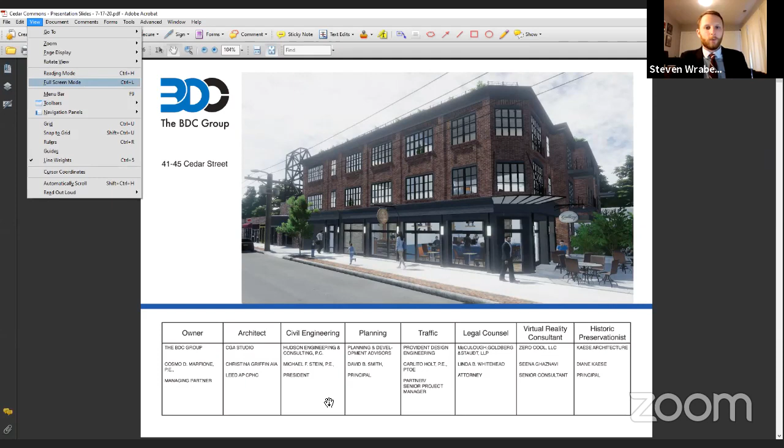So just for the record, again, my name is Steven Wrabel. I'm with the law firm of McCullough, Goldberg, and Staudt. I am here tonight in lieu of Linda. She unfortunately had a conflict, but we are here for Cedar Commons LLC.

As was previously stated, the reason for this joint meeting is that since the project has returned to the Board of Trustees, the applicants and the board have discussed it and the plans have undergone some changes. Most notably, it's now proposing a partial fourth story, so this is the iteration we're now calling Design B. The partial fourth story has a number of benefits we see. Very notably, as the mayor mentioned earlier, it's much less excavation because it allows for parking on the ground level, which shortens construction time and impact.

And it also allows for additional affordable housing. We're now proposing 3 units, as well as a greater diversity of housing types. So with that change, the applicants sought to mitigate some of the impacts, because obviously an additional story typically means additional height. But what you're going to see as we go through the plans is that the overall height of the first 3 stories was actually lowered from what you saw in Design A, the prior iteration. Because the 4th story is only partial and staggered, for a lot of these views, like this one on screen where you're only seeing 3 stories, it's actually a shorter looking building than what was previously proposed.

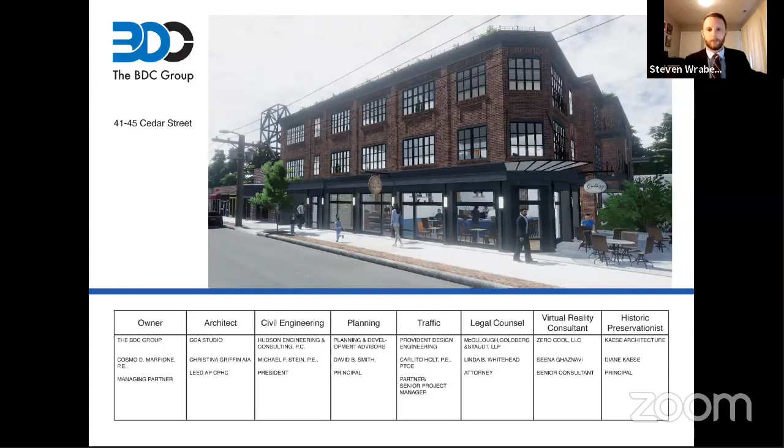The last thing I want to note is that we did just receive the July 15th letter from Mazer Consulting, which acknowledges that our traffic consultant has now addressed all of their traffic comments and questions. So we think these are all positive changes to the project. We think this makes sense. And I'll turn it over now to Christina, who can walk you through the details of the plans and take you through the VR.

Good evening, everyone. Can you hear me?

Yes, good. Okay, I'm Christina Griffin, principal of CGA Studio Architects. We've been through a long process, and I'd like to take you through the changes we've made in response to the comments by the Board of Trustees.

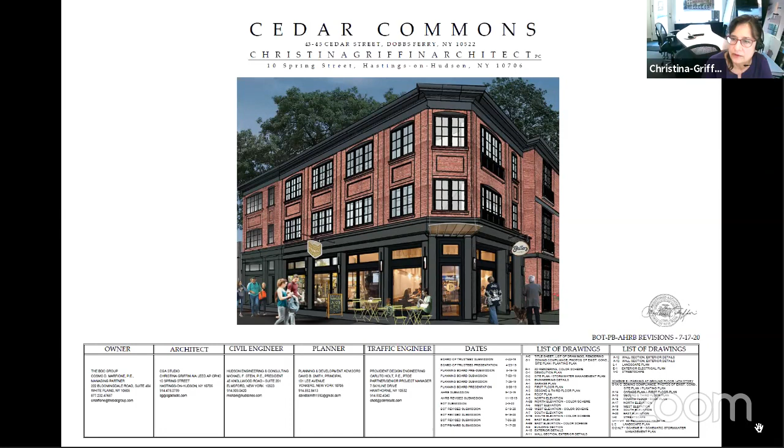We have developed two schemes for the project. Design A is a scheme that was reviewed by the Planning Board and the Architectural Historical Review Board, giving a favorable referral to the BOT. Design A was a 3-story building with parking at the basement level. Design B is a 4-story building with parking at the first floor level, and the 4th floor is set back 37.5 feet to make sure you would not see that 4th story when walking down the street.

The advantage of the 4th story is that we eliminate all the excavation that is significant when we put parking down below at the basement level. So our new scheme, Design B, now has parking on the 1st floor, requires less excavation, less construction time, less disruption of the downtown during construction. The two schemes have the same number of parking spaces, roughly. Actually Scheme A was 27, Scheme B is 26, because we had to reconfigure the parking to make sure it fit on the 1st floor. So we have 23 in the garage and 3 on street.

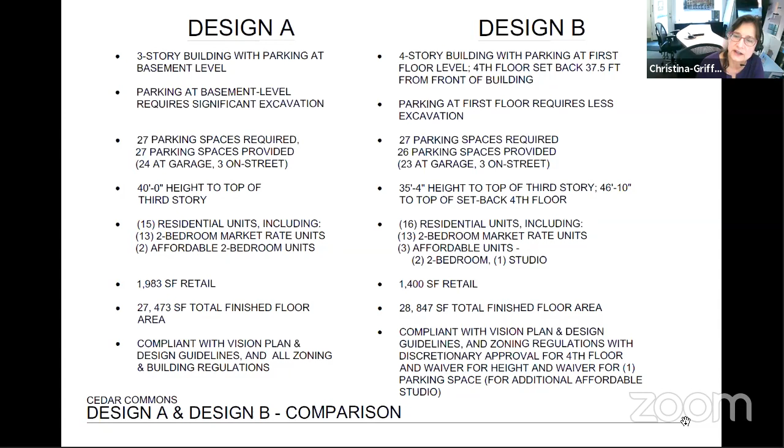We have another comparison chart just to give you a general idea of the benefits of this Design B.

The impact and effect of this project will give an infusion of 1.3 million annual discretionary spending. It will have a significant increase of tax revenue, creation of 50+ jobs, and lower current street parking demand.

The benefits specifically of our new design, Design B, are as follows: decreased construction time, less impact on the village downtown during construction, less excavation, less potential rock removal, 1 additional affordable housing unit, and a 4 feet 8 inch decrease in height of the 3rd floor component of the building.

All parking is concealed from view. Only 3 stories are visible at the rear of the property. There's less retaining wall and more developed green space between the building and the property line adjacent to Zion Church. There's also a slight increase in tax revenue compared to our previous scheme.

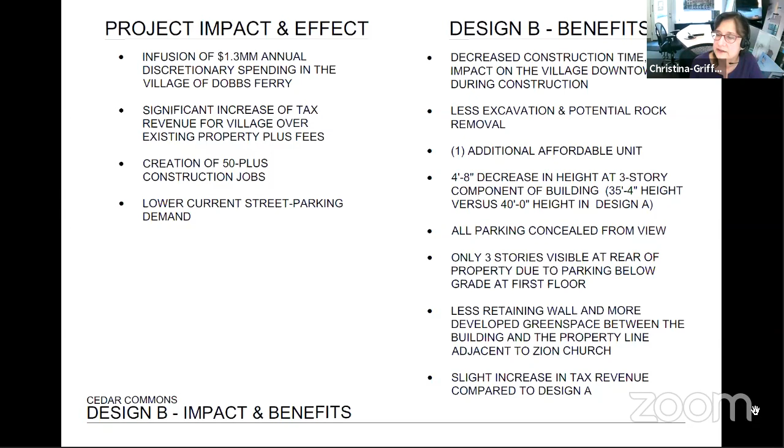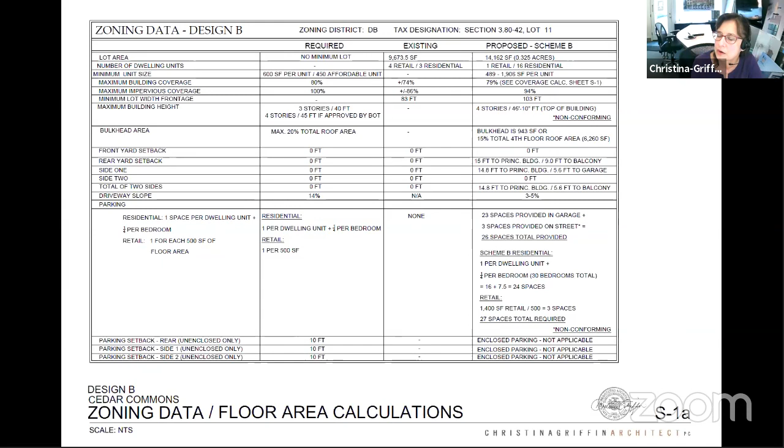Next slide. This is our zoning data, which shows that we will need a waiver for the height and for the number of 1 parking space. In other respects, it meets the zoning code.

This is our site plan and planting plan. In response to long discussions about how to handle the buffer area between the Zion Church property and this building, we changed our site plans to eliminate the retaining wall that we had on the west property line.

We did this so that we could develop the green space and have a more flowing space. We are proposing to add plantings on the Zion Church property, add a few trees, and protect and save the 32-inch maple if at all possible. We had an arborist report made, with recommendations that have been reflected in this landscaping plan.

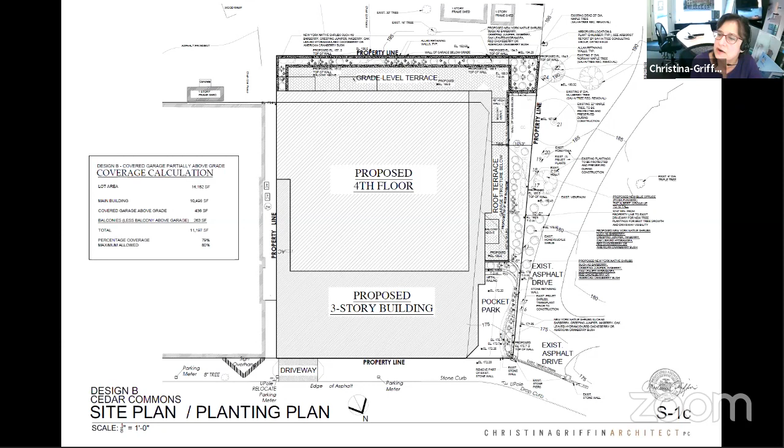We're also showing grade level terraces and a roof terrace which covers the parking area, which is now fully concealed from view. Next slide, please.

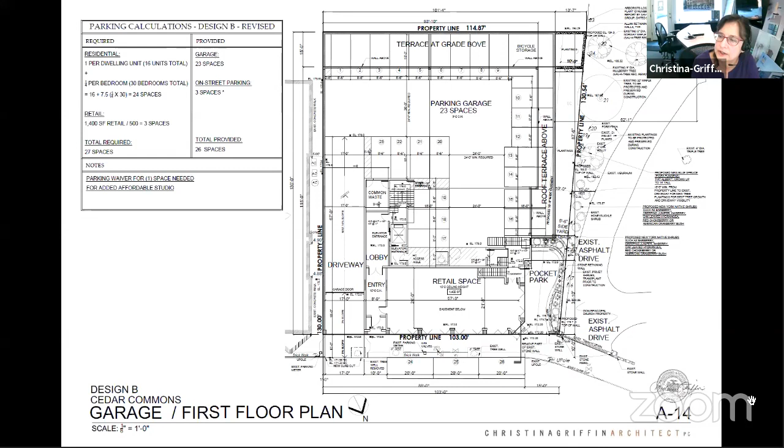Next slide. This is the second floor plan. I'm showing this so you can see that we've added an affordable housing studio unit, unit 2, by reducing the size of the market rate units. Unit 1 is a 2-bedroom affordable housing unit.

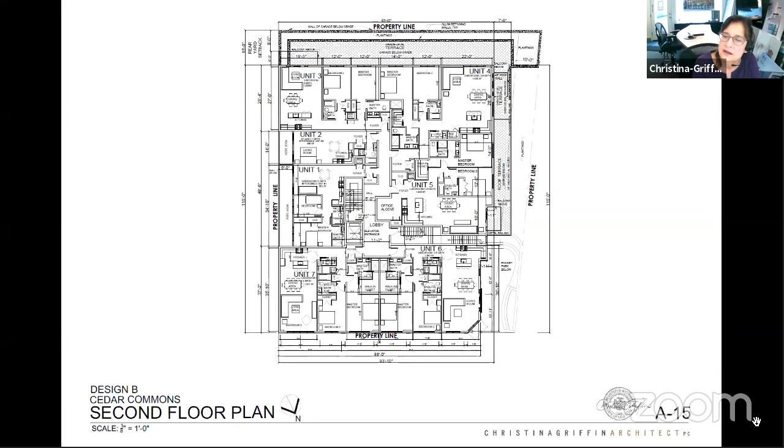On the 3rd floor, we have a 2-bedroom affordable housing unit, unit 13. So we have a total of 3 affordable housing units and 13 market rate units. Next slide, please.

These plans now show a 4th floor. We simply took the units that were originally on the 1st floor in our design A, and we moved them up to the 4th floor so we could use the 1st floor for parking. So these are those three units up here.

We've set back the 4th floor 37 feet 6 inches, and we're going to show you in our 3D views the reason for that is to have this sense of a 3-story building as seen from the street.

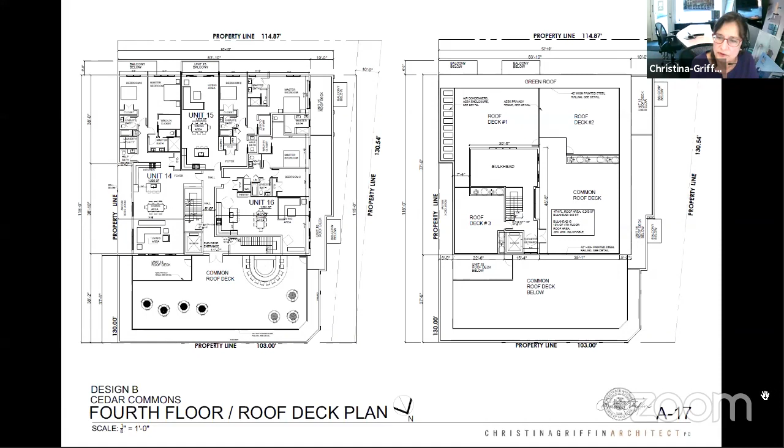This is our elevation. It's the same fenestration and details and window treatment that we had previously, which was reviewed by the AHRB. The main difference is we reduced the height. Now the top of the third floor is 4 feet 8 inches lower, and we are using 12 feet as our ceiling height inside the retail units.

And then up above, you see our fourth floor. The total height of the building is just slightly higher than the maximum of 45 feet because of the space and clearances that we needed down in the parking area. Next slide, please.

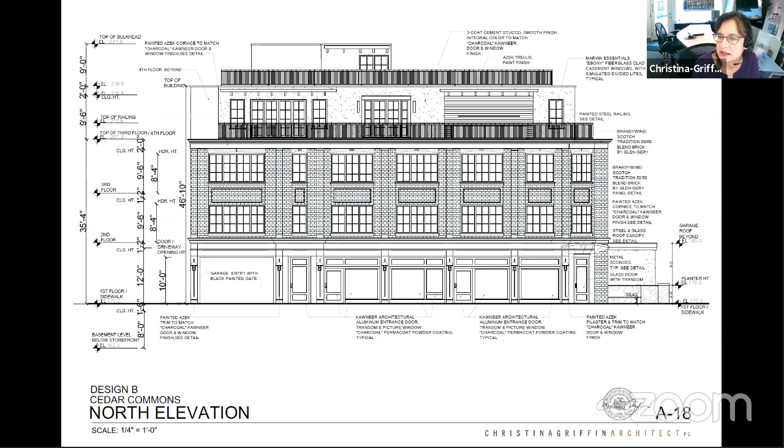This is our west elevation, now showing that the grade is up against the wall of the building. So you'll see this piece of building here that's coming up above the grade is actually the parking garage. Above the garage are terraces, and the rest of the garage is entirely buried below grade, concealed from view.

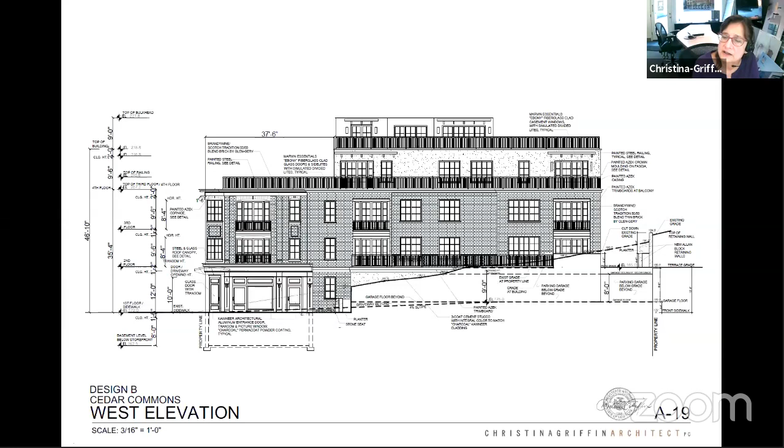Next slide, please. Our south elevation - if you see this dash line here, that is the grade at the South Presbyterian Church property. So when you're up on that hill, you look down and you will see 2 stories of the building, the third floor and the fourth floor. Seen from this view, you will see 2 stories above. And when you're down at the patio level in front of the units, it's 3 stories.

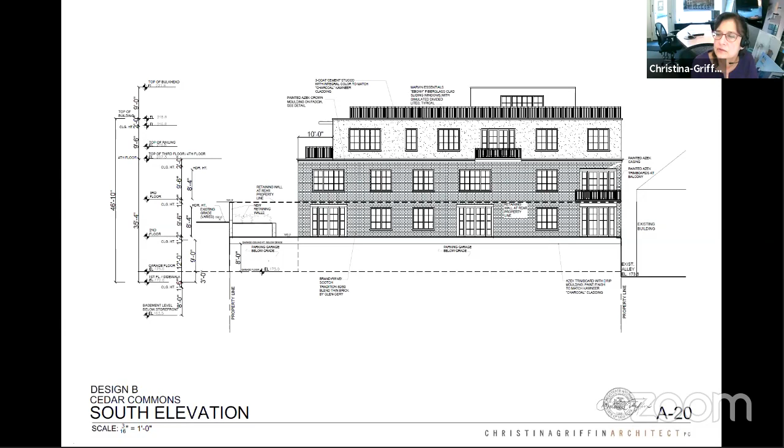Next slide. This is our east elevation. It's just showing the shape of the theater building in comparison with our proposed 3- and 4-story building.

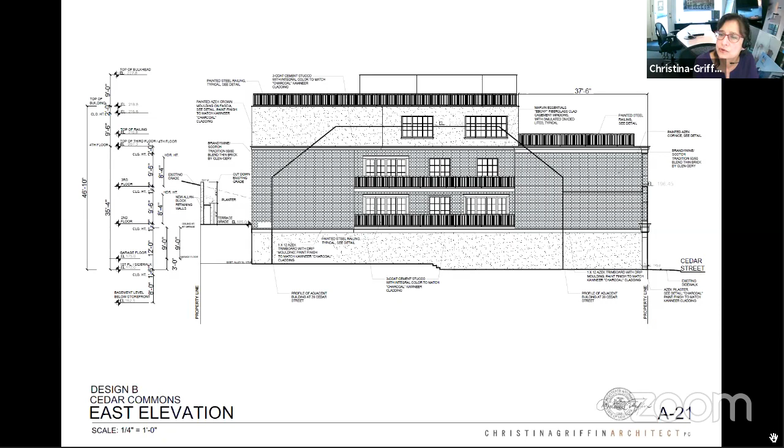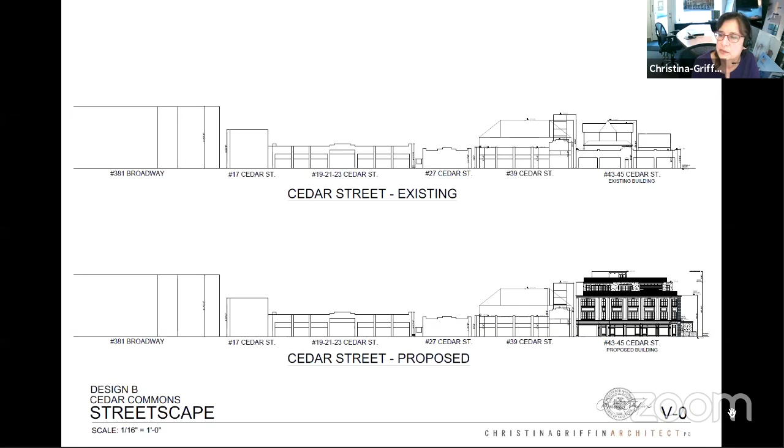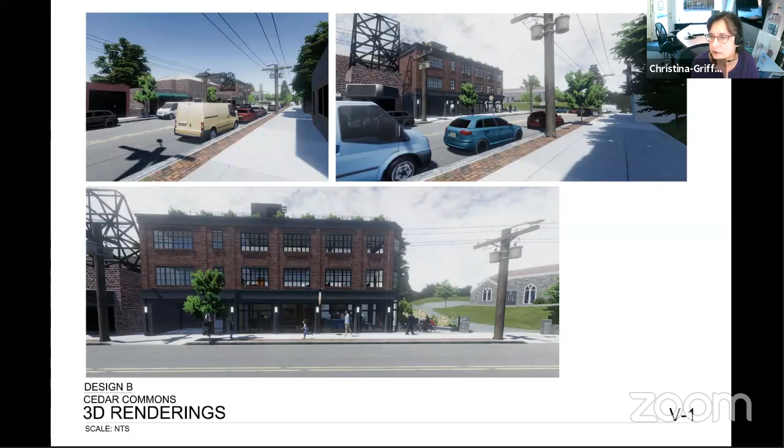Next slide, Suzanne. This is a view at the top of the slide, looking towards the east at the entrance to the retail space. You see the 4th floor up above, tucked back from the front facade and set back on the side as well. And then on the bottom is another view from the Zion property, looking back at the building.

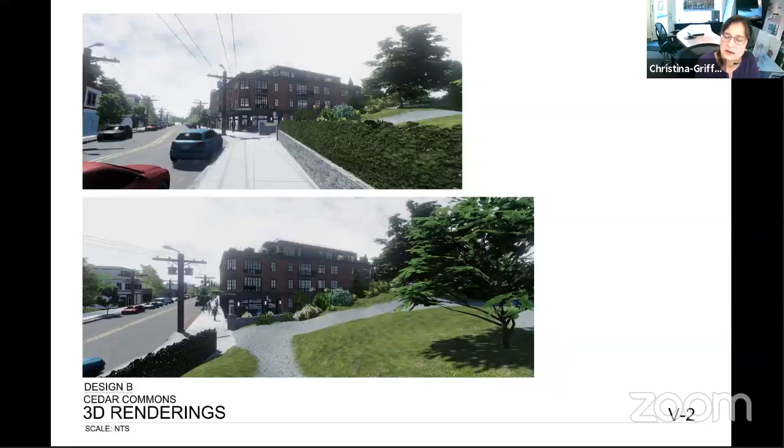Now, I think we can show you the virtual reality.

So we have a few more stills. This is the view looking from the driveway, walking up the driveway, looking directly at the western facade of the building. You can see the shape of our scheme B. And then the bottom is a view from the top of the driveway, looking back at the building.

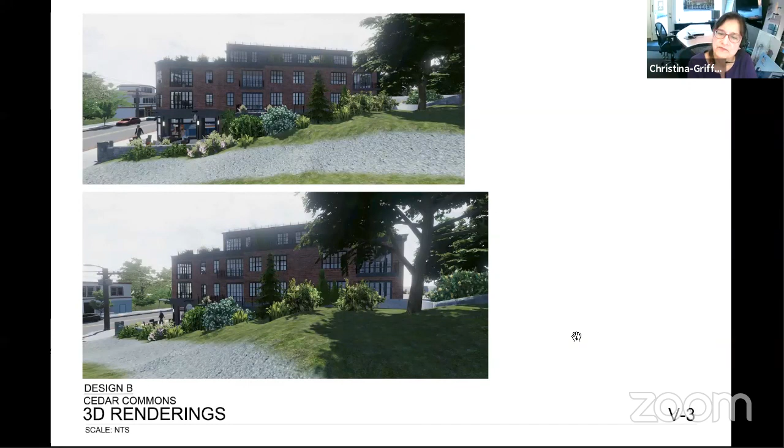A few more stills. This is a sidewalk view of the front of the building, looking at the entrance, corner entry detail. These are the same details we had in the previous scheme. And then this is the bottom view - a nighttime shot showing the pocket park and the lighting here, and how the sidewalk wraps around the entry, creating a corner feature at the building. This corner feature was very much a part of the idea that because there's a bend in the street, there would be a nice feature to break up the rectangular shape of the building.

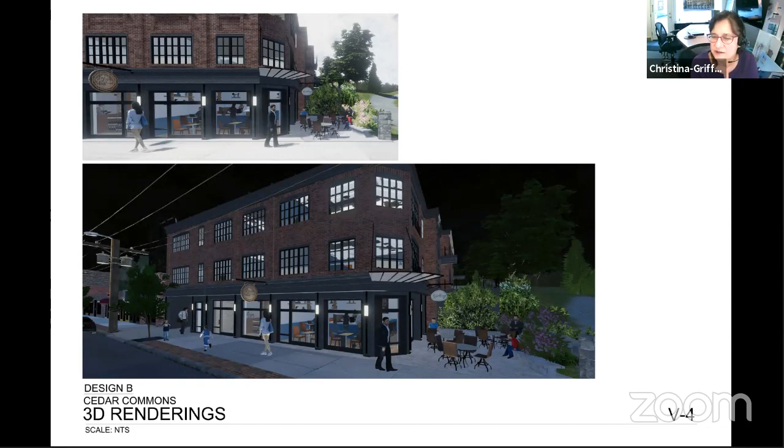So I think now we can show you the virtual reality, which has been revised to show our scheme B. And I think Sina is going to do that for us.

Yep, one second. Sina, just give us a minute. He's setting it up. Okay.

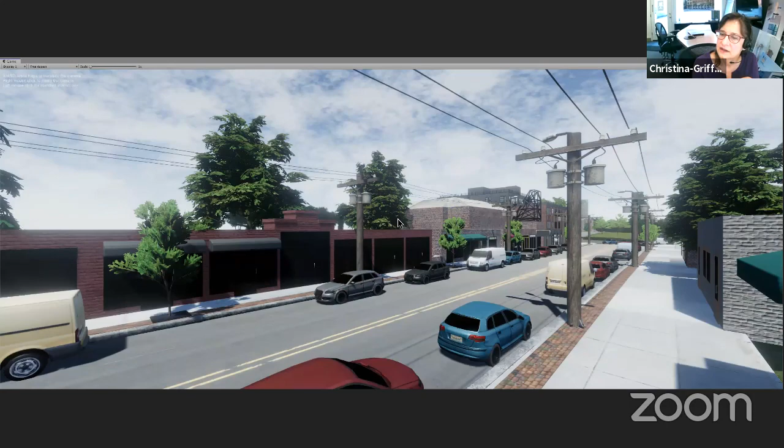Okay, now Sina is going to take us down the sidewalk, walking towards the building. This is a simulation of someone walking down the north side of Cedar Street, looking back at the building. Here we're approaching it, and you can see the tower of the theater, and the 4th floor tucked in the back there.

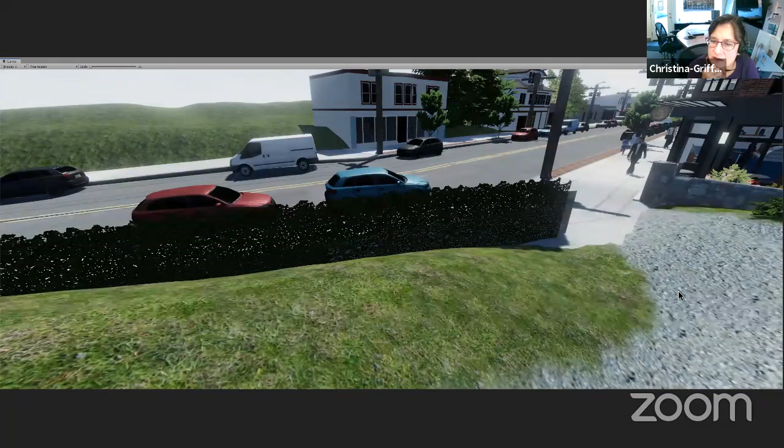And the difference, I'd like Sina to go back to that parking area. He's going up the hill, and he's going to turn around and look back at the building. I wanted to point out how we've developed the property between the building and the driveway. This whole area has now been filled in so that we have the opportunity for a nice plant bed, and as you go up the driveway, as soon as we have enough space, we've added a few trees.

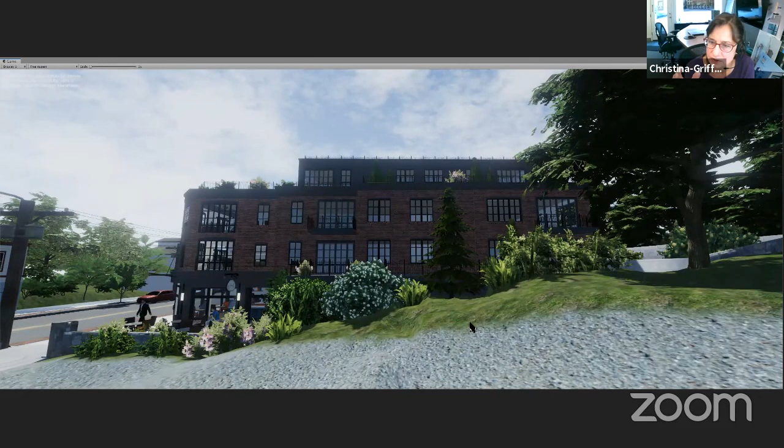These are not the exact species, this is a simulation that comes as close as we could make it to our landscaping plan. This shows the mix of shrubbery we put in there, one of the trees we're proposing, and the large tree is the 32-inch maple that exists. By eliminating the retaining wall, we have more of a chance of saving that tree.

There have been meetings with Cosmo Mafioni and the Zion Church representatives to review and discuss this planting plan, and we have a proposal in front of them asking if they would allow us to develop this property so that once it's affected by construction, it can be replanted and made into a really nice green space.

So that's our presentation. I would like to give this back now. I'd like to first ask if you'd like to see any other views of the virtual reality, since we have it up here in front of you.

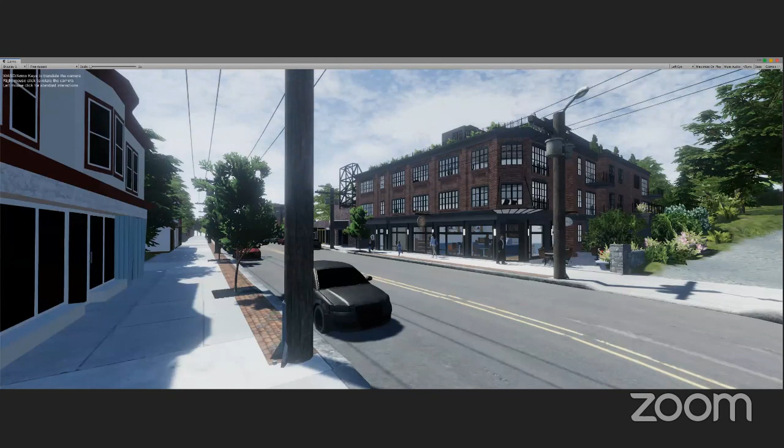Do you have the 3-story version available in virtual reality to just compare that? I'm not sure, Sina, do you happen to have that? Yep, no problem, just give me a minute. Great, thank you.

Larry, are you talking to us? I haven't said anything, you're asking me if I'm saying anything? No, I see Larry, he was doing gestures. Okay, now I'm unmuted. I'm sorry, I thought I.

It looked really good, but related to Christie's question, is it possible to see an outline of the proposed 3-story building against the proposed 4-story building, and an outline of the existing structures, just to get a sense of the relative mass and what it would look like if the building were 5 feet higher, even though it's only 3 stories in the front, because I think that might be useful. And also to see a silhouette of the existing structures against it, to get a sense of how much the massing is changing.

Yes, of course that's possible, but I don't think we have exactly what you're looking for tonight. We do have the streetscape. If you'd like, let's start by answering the first question and show you the virtual reality for the previous scheme, and then maybe we can pull up the streetscape again.

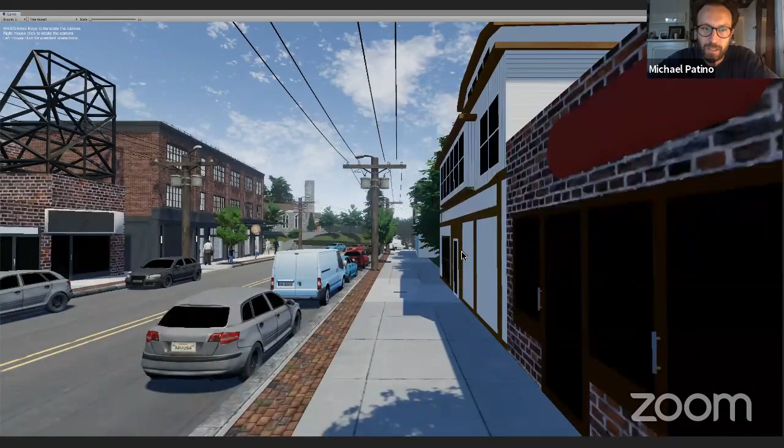Just want to jump in. Christina, I think you can show us just the front elevation of Scheme A and Scheme B, because I think the question tonight, particularly for the planning board and AHRB who've looked at this a lot, is what's the difference between those two. That may get to a lot of what Larry's asking about, at least for tonight. Do you think you can do that?

Presumably, if you took a screen capture of this view and compared it to the other one, it would essentially put them side by side or toggle between them. It would show it. Yeah, okay, I think we submitted those.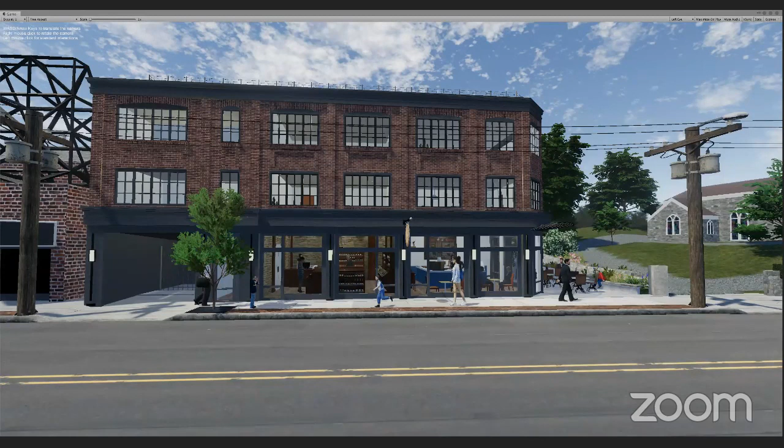If I could jump in, my recollection is that in the package we submitted, we provided just that: Design B was shown on sheets V1 through V4, compared with Design A, shown on sheets V5 through V7. This would have been in the package submitted for the meeting on July 17th.

We can toggle between them, we can pull it up. This is Design A, and we can toggle between that and Design B. Isn't that right, Christina? Yeah. I have the stills that we can toggle back and forth, but maybe do the VR since it's up for Design A, and then we'll do that. Is that helpful? Up to you guys, it's easy for me to share whenever you want.

I think it might be easier to toggle between the images rather than the VR, because it takes me a little bit to load it up. I'll do that, Suzanne will send it up. All right.

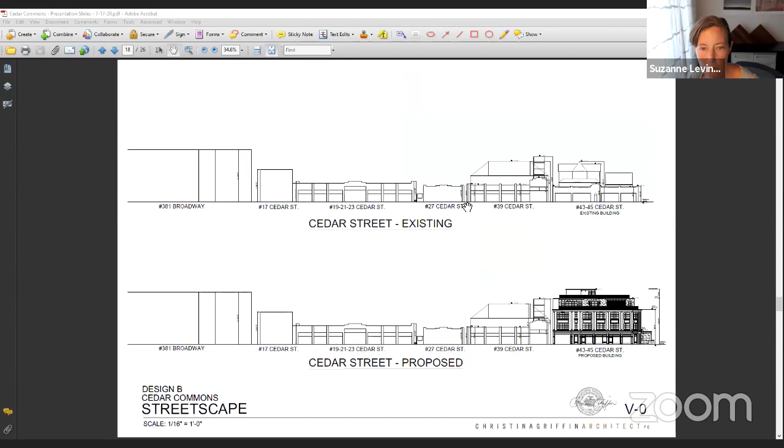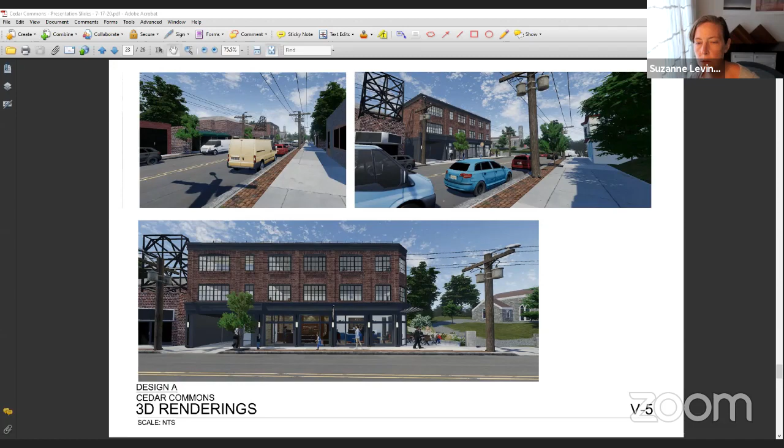So this is Design B, and I'm afraid it's a few sheets away, but I'm going to switch to this, and this is Design A. I'm trying to see how I can show you both of these at once. If you bear with me for a moment, I'm going to see how I can do that.

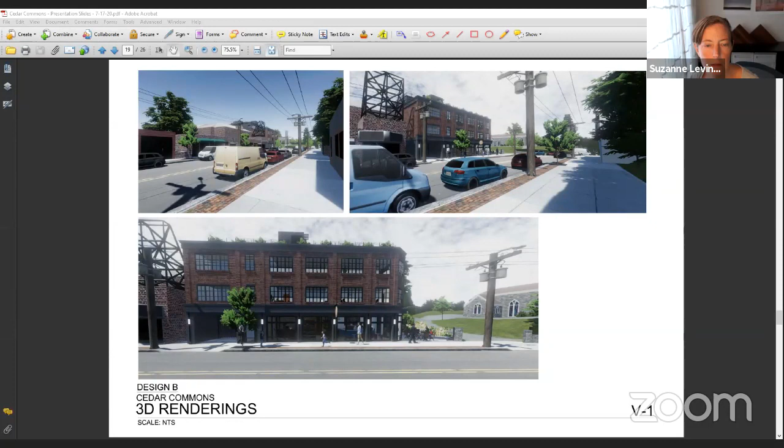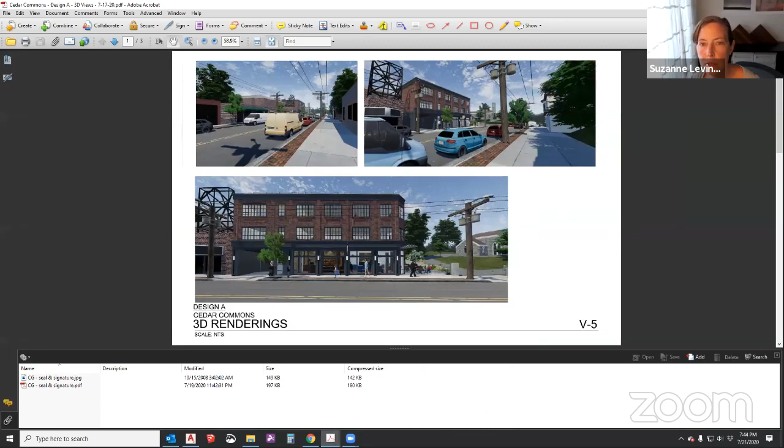I'm going to share again. Sorry, I'm going to share my whole screen here so I can try and show this to you. Okay, this is Design A.

And this is Design B. Design A. Design B.

So you should have received both these sets in the submission packets on Friday. You can put the printouts next to each other as well. So it doesn't seem like there's much of a difference, except we can see a lot more planting and a little bit of a fourth floor.

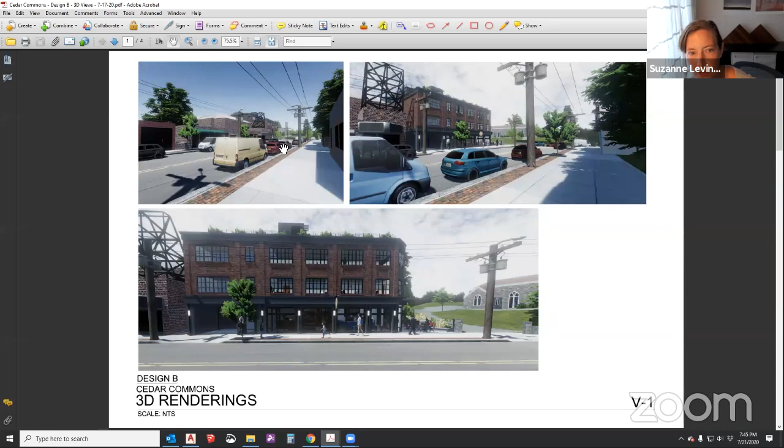Yeah, right, let's look at this. So in Design B, I can try and point out the changes. The fourth floor is here and here. The height is reduced in comparison to the tower here. Let's look at, and you can see the height is a little bit higher now in comparison to this tower, and we've lost that fourth floor.

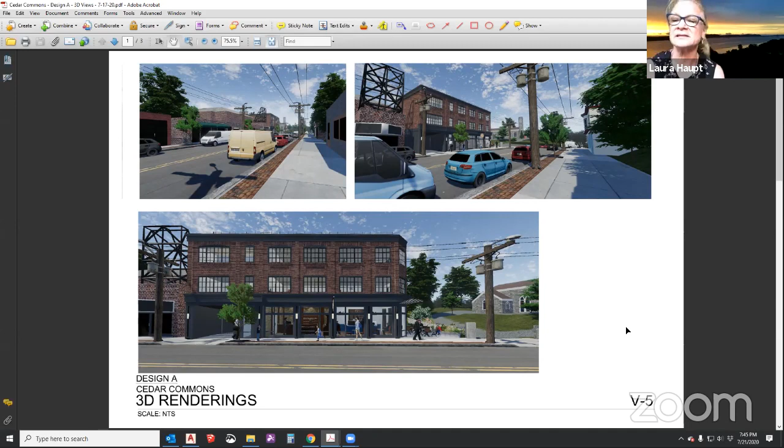I actually like the second scheme. But...

I'm going to go to the next views because I think a real benefit of this scheme is that, especially around the back, the grade comes up so much higher that the building seems like a smaller building from the back. So let me show you.

I think what's interesting is that your scheme B is a lot softer to the streetscape, where in the first proposal it's a little more harsh. It's very, I don't know the word, like industrial — not industrial, but very regimented — where the second scheme is a little softer to the community. So that's just my opinion.

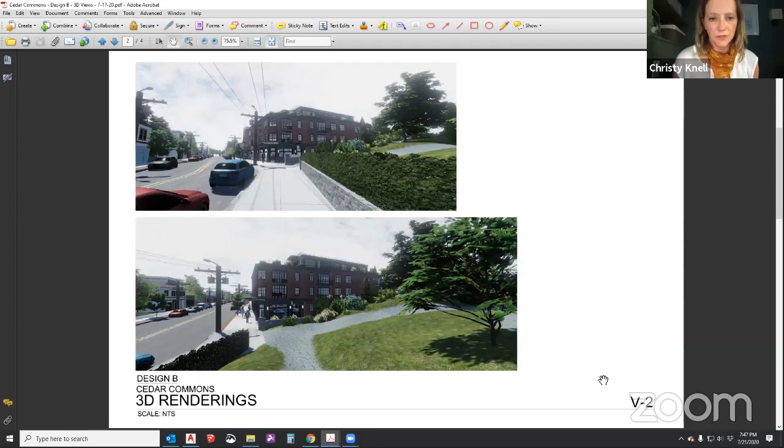In Design A, the reason we needed this path was partially for egress. We have units at the first floor level, and we needed two means of egress, so we have an egress exit from the back. We needed a path along the side of the building, which we don't need for scheme B because we've reconfigured the egress, so we didn't need that.

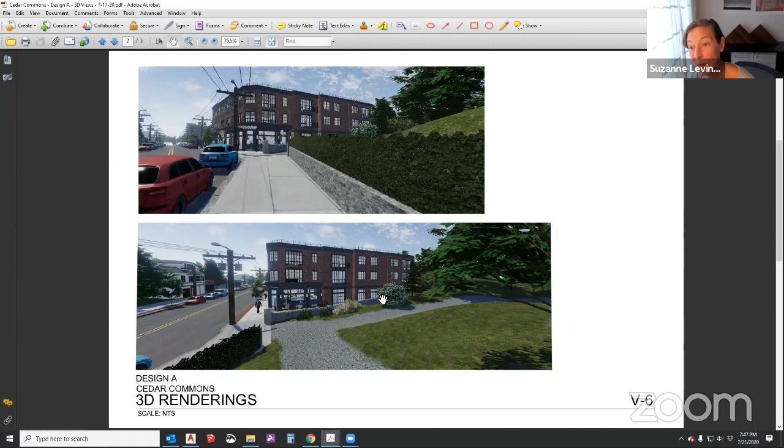Also, we wouldn't be able to have units here with that similar grade because it would be below grade. We wouldn't be able to have windows or light, so it doesn't work when you have units at the first floor, but it works fine when you have parking because we have mechanical ventilation and lighting. So the answer is no, we could not do this type of landscaping up against the building for scheme A.

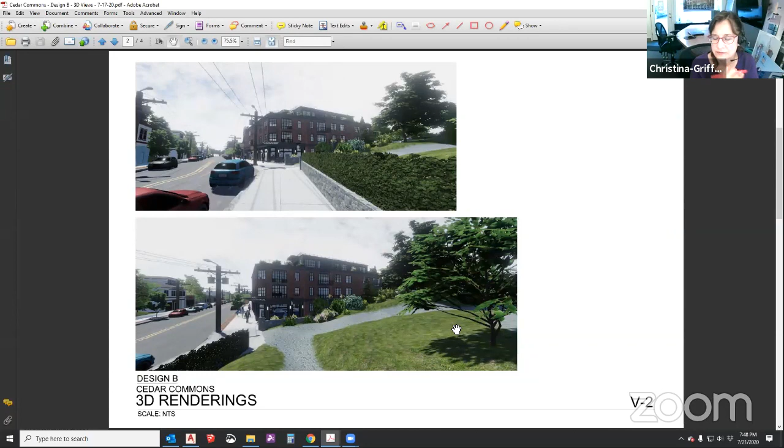And I'm just going to see, I think we have this to compare. This is design B, from a bit further up on the Zion property. And this is design A, a little bit harsher with that wall in the back too.

With design B, the parking is below grade, so really it becomes like a roof terrace in the back, off the second floor. Whereas with design A, you're looking down into the property to allow for that egress path, and you're seeing more retaining wall because the grade is lower there.

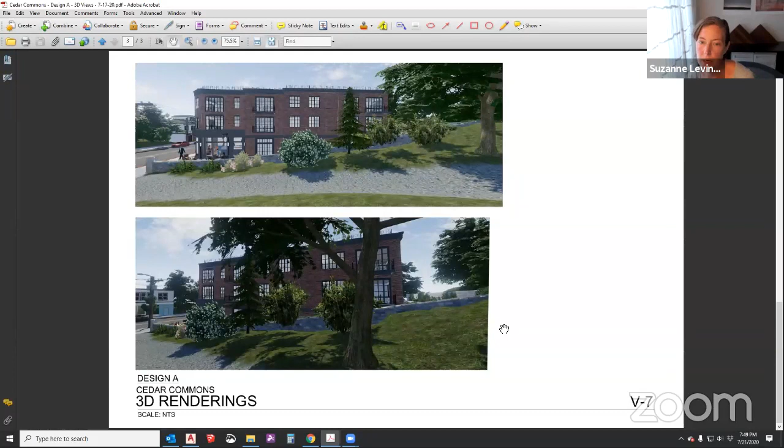And I'll go back, this is design B. We can show you those views maybe a little bit better in the virtual reality, looking into the back there a little bit from above, so you can get a sense of the difference. So I think those are the views we have to compare between the two schemes.

Where should we go from here? Do you want to go back to the VR, or?

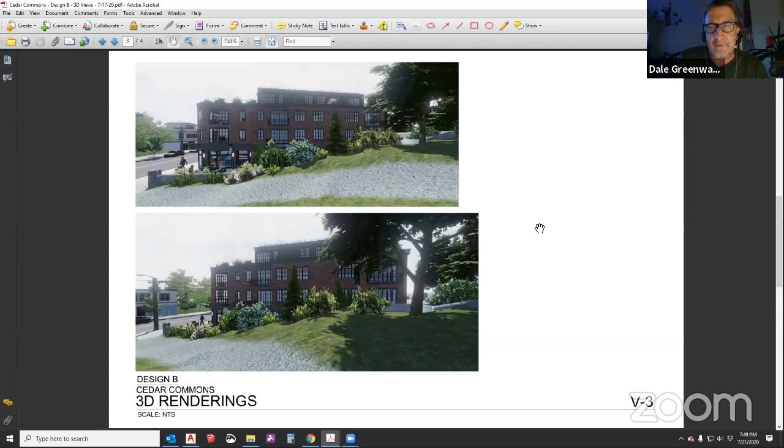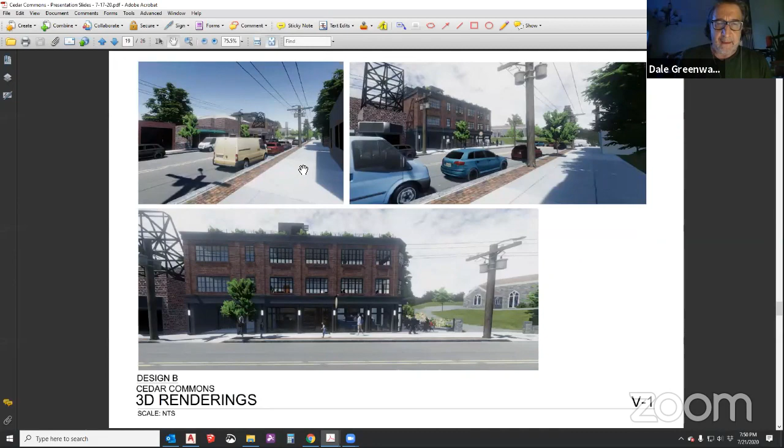I noticed in your plans on the third floor, fourth floor level, unit 14 has a private deck area, and you've shown some sort of enclosure on it. That enclosure doesn't show up in the elevation or in the virtual rendering. Is there some intent or restriction that would keep an object from being built out? No, I think we showed the massing and the railing around the decks in the VR and the renderings, but we didn't develop this plan in the VR.

I'm talking about the lower left corner of the front roof deck. There's an object there that says private terrace. What is that enclosure going to be? That detail, we did submit to the ARB. It's an AZEK, and we have a metal railing around the perimeter, and then this would be a painted AZEK privacy fence, maybe 4 feet, 3 feet 6, something like that.

But we can show that on the VR, showing this perimeter railing going all the way around. I'm just wondering if that privacy fence at 6 feet would show up at all in the view. I don't think it would be 6 feet, it could be, this is a 42-inch high fence, so probably 42 inches. We have it. I think because this is 40, we're happy to show it on the VR. Do you want to see that?

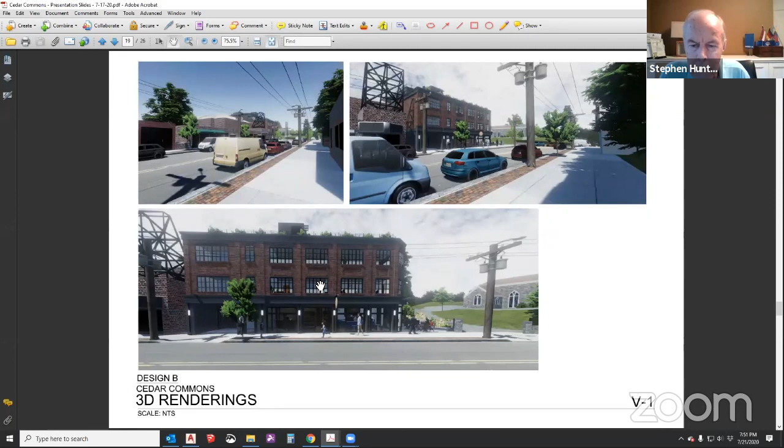A small thing, but it strikes me in looking at these pictures that one thing you see very prominently are the power lines going down the street. It would seem like this is something we may have to do in pieces, but while a new project's underway, it would make sense if feasible to put the line underground from maybe down by the Japanese restaurant through your property at least, so we get rid of 2 or 3 poles. We can definitely look into that. I don't know if it's been discussed with the civil engineer.

I have just a question and a comment. 46 feet 10 inches to the top of plan scheme B is to the flat roof of the 4th story, correct? Yes. So there's the railing, and then there's a stair tower or elevator tower on top of that? Yes. And what's the total height of the building to that point? An additional 9 feet to the top of the bulkhead. Okay.

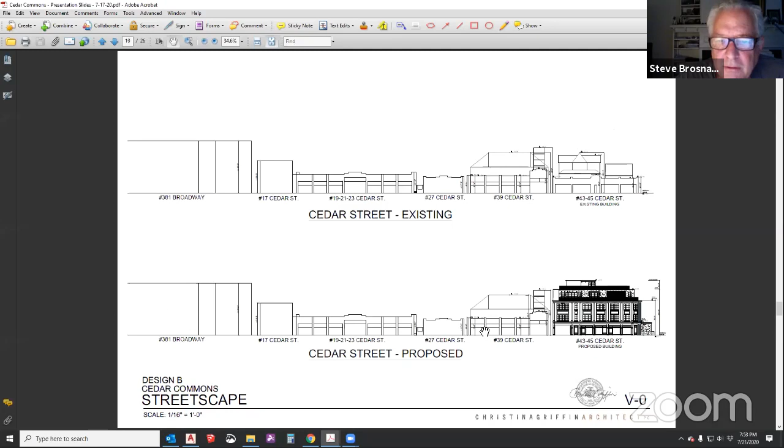My other comment is, thank you very much for that VR. It's incredibly useful, and we really appreciate the time you've taken to show the building. I notice you are using a very wide lensing on that VR, and objects are closer than they appear in that lensing. So especially in the shots from Zion, the building is going to look a lot closer viewed from Zion. That's just a comment. I don't know if you can adjust the lensing on the VR, but I'm not asking you to do it. It's just an observation.

I have a couple of thoughts also. First, I'd like to thank you for the great presentation, this is super helpful. When we look at the side views, this is where I see the big difference. When you come up or down the street from either direction, you really see that 4-story. From the street, you can see the bulkhead with design B, where with design A, you can't see the bulkhead. I feel like the massing feels much larger. I understand we're benefiting the buffer areas, the planting, the ergonomics around the building, the parking - there are a lot of benefits to design B, but I feel there's a real negative in the massing because of that 4-story from the side view.

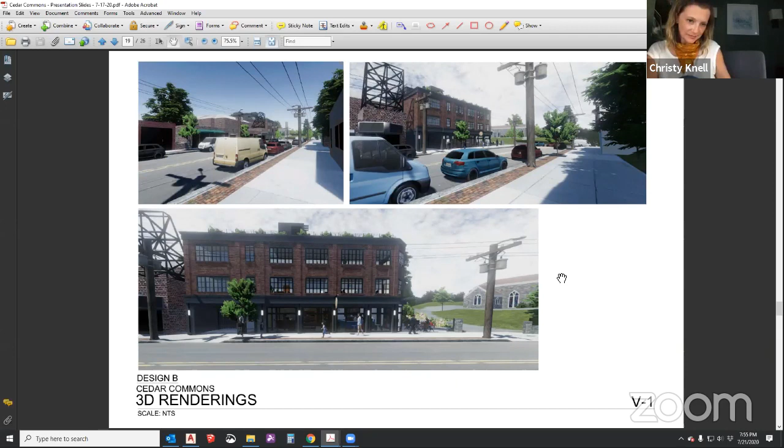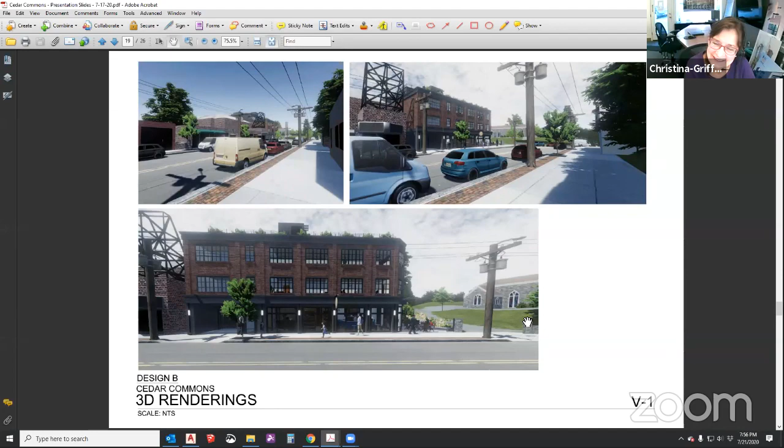Oh, I have one other question, Christina. The beautiful drawing you probably did by hand that showed all those nice facade details is quite different from what's shown in this virtual reality. Is there any kind of indication of where that's going to end up?

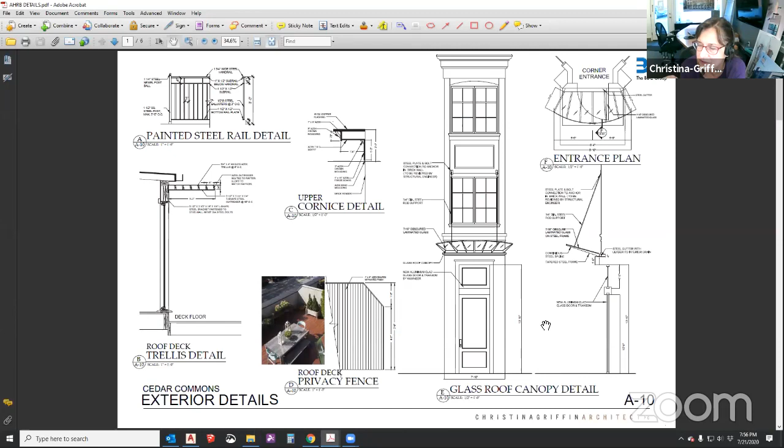Yes, it is done by hand. We did submit these details to the AHRB, which I could pull up if you want to see them, but it's all been detailed - all the cornices and the brick details have all been developed and kept the same. It's just that a lot of the fine detail isn't easy to show in the virtual reality. I don't think it's showing as much detail as some of our architectural drawings.

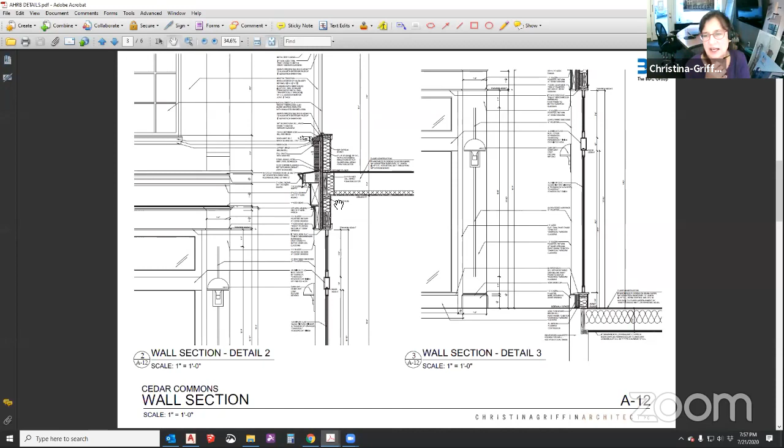So does that mean the answer is somewhere in the middle? When I drew that rendering, if you look hard at the 3D rendering, it shows a lot of the detail that Suzanne's showing you. The focus of the virtual reality was to really give an idea of the massing and view from the street, so I don't think the VR has the level of detail of the rendering and 2D drawings. Okay, thanks - I think that drawing is quite attractive, so that's why I asked.

I'm pretty sure I know what the answer is going to be to this, but I feel like I should ask it anyway - what are the chances of doing Plan B without the 4th floor?

I don't think that is an option with our team, because to do a project like this, you need a certain balance to make sure it's feasible financially - to do all the infrastructure with the parking areas and parking garage, elevator, handicap accessibility, fire suppression, sprinkler system, all the different upgrades. It has to be balanced with the number of units to make sure it is economically feasible. I think Cosmo Marchioni would probably - I'm not sure if he's here, but he's watching - agree that's not an option we would consider. There's a certain number of units we felt we had to provide to make this workable.

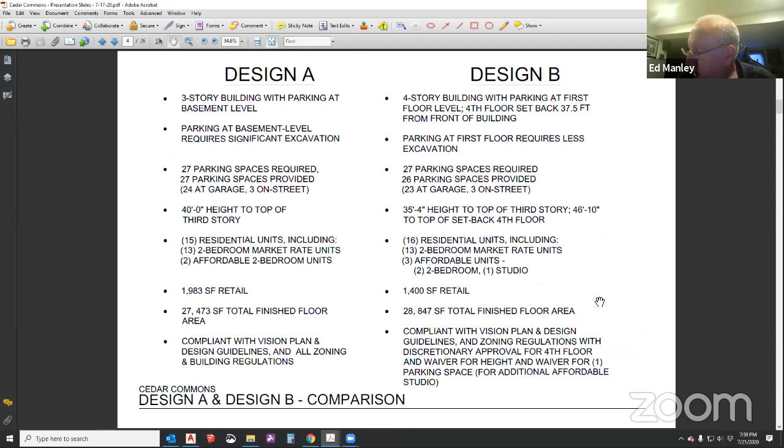Christina, Ed Manley - regarding the bulkhead, if the board were to grant the fourth floor option, the height and everything is at the consideration of the board. As you said last meeting, the bulkhead would fall into the requirements of the 20% of the roof area under code, but since we're adding a fourth story, the whole thing is at the discretion of the board. I look at your bulkhead plan and I see the staircase, the elevator, and then a fairly large room behind it. What's the intent of that, and why make that side view of the bulkhead above the fourth story so large?

This building, the way it's been designed, is so tight - it's been tightly designed, so there's hardly any mechanical space. We wanted to make sure we had enough; we haven't developed that yet, but that was the idea. We decided this is at 15%, and you can go up to 20%, so it still meets the code for the size of a bulkhead. It really is a place saver for potential mechanical equipment. We know we can't simply have air condensers, which we do have on the plan, but there's going to be a lot more mechanical equipment than that.

So since the whole thing is at the discretion of the board, the 20% doesn't even matter - it's moot because it's not as of right. So again, I think if it's a place saver, it could be smaller.

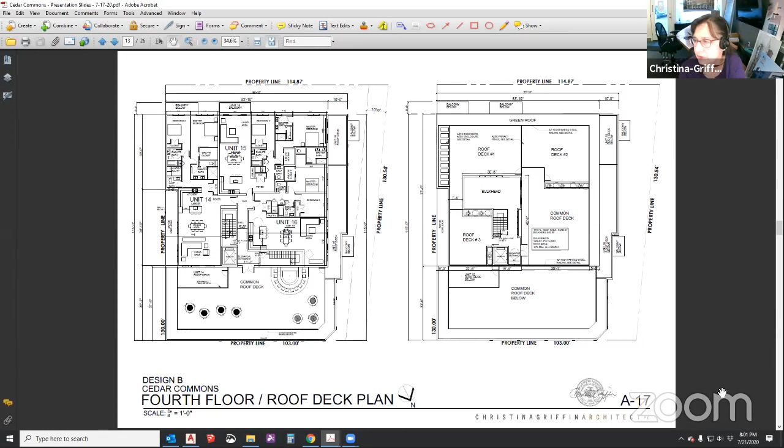We could look into that, Ed, and see what we really need for the building. Can other members of the board ask more specific questions to the other boards for information that we're looking to get?

Well, yeah, certainly you could ask any question you want. I mean for people on our board who are considering a fourth story, what kind of information do you want to get from the other two boards to help inform your decision on whether or not we're going to go with it? Is it about the massing? Is it about just in general their opinions? Do we need to go over why we would be allowed to have a fourth floor and how this meets those requirements, and if they think it's worthwhile? Specifically, what are we trying to get out of all the people here?

Well, the planning board has already reviewed one design and opined about it, as has the AHRB. So I think what we would like is their opinion, their comments on design B, which would help us in making a decision whether we prefer A or B or some version in between. So I think we're here to listen to the comments and opinions of the other boards.

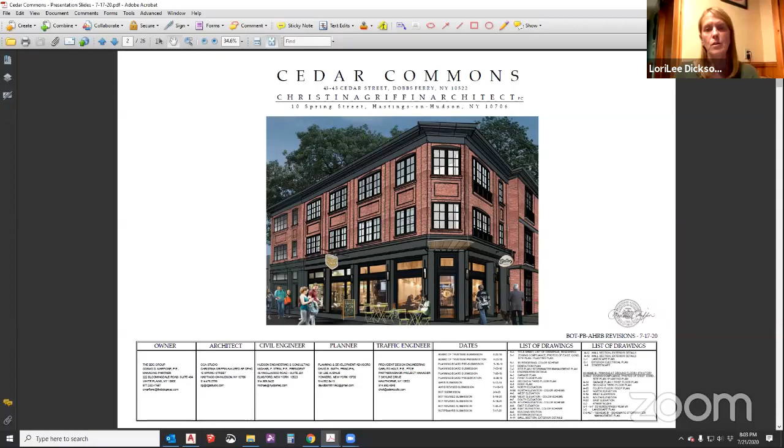Yeah, the decision on the fourth floor is completely within the purview of the village board. So you're looking for comments and recommendations from your more technically minded boards, and they're providing those to you when you're all seeing the same presentation at the same time. So we thought that this would save a tremendous amount of time and effort.

And also if the other boards wanted to see massing specific to the presentations, go back to the VR, show this - like what just happened, can we see the massing side by side? That's helpful to the question. But in terms of the decision under the criteria in the code, it isn't really relevant to the design, which is really what they're looking at, the design. And in terms of the AHRB, the architectural elements, those are the comments you're looking for from them.

I also want to give a little context. Some time ago when I was on AHRB, I met with the other AHRB members, Steve Hunter, Rob Lane. I think we were all there with the applicant, and we walked through. We had discussed this a little bit, and we discussed the various merits. And I think it's that question that's just come up again in this. And I think we just like to - both of those boards looked at this project as a scheme, the 3-story scheme. It was both of the boards made a recommendation for that 3-story scheme.

And so now, in light of this other scheme, some benefits and some drawbacks to this alternative scheme, I think we'd just like to hear from the planning board and AHRB what their opinion about this revised scheme is.

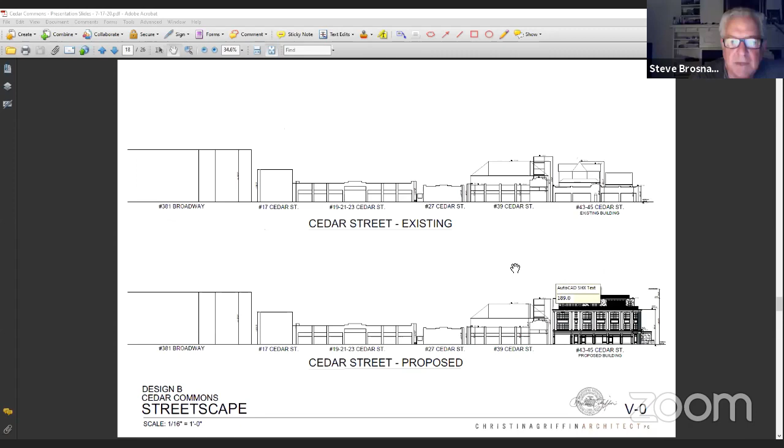Shows the rear elevation. I think you had a rear elevation in the last one. Well, we could look at the rear elevation, sure. Rear elevation, okay, hold on. Just curious. Yeah, the view from South Presbyterian. Yeah, Presbyterian. You can't see it from the aqueduct. When you're walking on the aqueduct, you only see Zion. No, because there's a parking lot, you go through the parking lot there. Yeah, yeah, well, you see Zion. I was there today and I took some pictures.

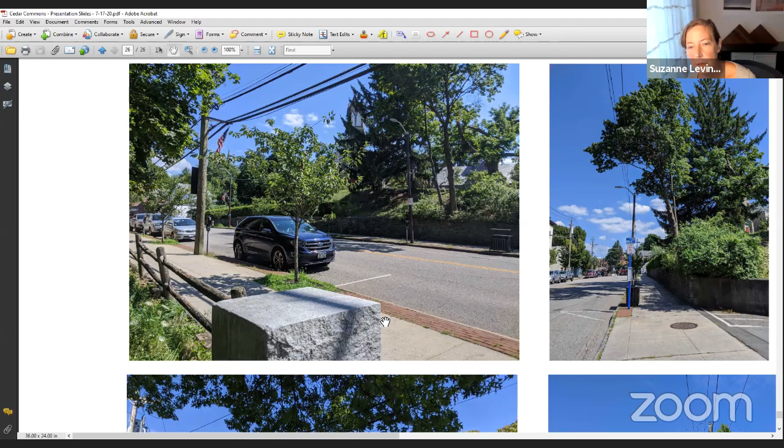If you want to look at the aqueduct question first, this is approaching the steps. We see Zion a little bit. The project is over here. Maybe in a winter view, you might see a little bit of that wall, but really the view of the project, this is the existing white building. You really don't see anything. Once you get to the top of the steps from the trail, it comes into view. And then as you cross the street, but once you're in this parking lot adjacent to Sushi Mike's, you can't really see anything. Or from the municipal parking lot, this is a view from there. So it's really, and then of course the aqueduct continues past the municipal building, so there are no views from there. So I just wanted to take you through that, and I'll go back to the rear elevation.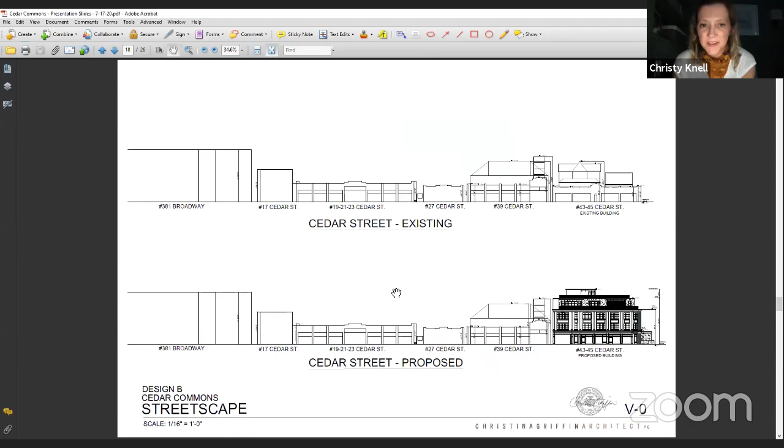At the top of the stairs at the aqueduct, when you can't see anything because there's greenery in the way, isn't that greenery going away as part of what's being removed between Zion and the building? You mean going away seasonally? No, going away when you're taking out the trees.

So this is down on the aqueduct. This is Cedar Street. This is the top of the stairs. Let's see.

But even from the direction of the municipal parking behind Village Hall, you really won't be able to see anything because of the trees there right now due to the season. Also, because of the hill, you can't see past it. You just see Zion when you're in the parking lot.

Yeah, I'm going to take you on a walk for it. I walked around it today, so I know it pretty well. Of course, I don't have the winter views, but here's the municipal building, and this is approaching that second parking lot.

These trees are not, I'm not sure if this is village property or Zion property, but it's on the other side of the church. This is going through, heading towards Cedar.

This is the end of the parking lot. So once you're on the sidewalk and look up, the project is over here, and this is Zion. But you don't see it until you're on the sidewalk. Then of course you cross the street and you see it. But as you drop down onto the trail, you don't see it.

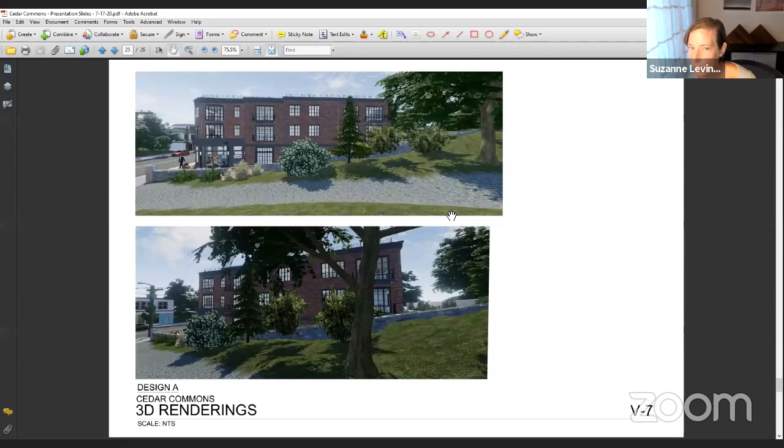I have photos from the Stone Church parking lot I can share with you. I took those today too. I don't have them laid out, but I'm happy to share them.

This is the rear elevation. This is the top of the retaining wall at the Stone Church property. When you see the hill going up behind it—yeah, it goes up from this point.

If you give me a moment, I can pull up those photos I took from the Stone Church parking lot today. I couldn't see the existing white building from the Stone Church parking lot—it's really covered with trees, but I'm happy to share those with you. We can do further study if you like as well.

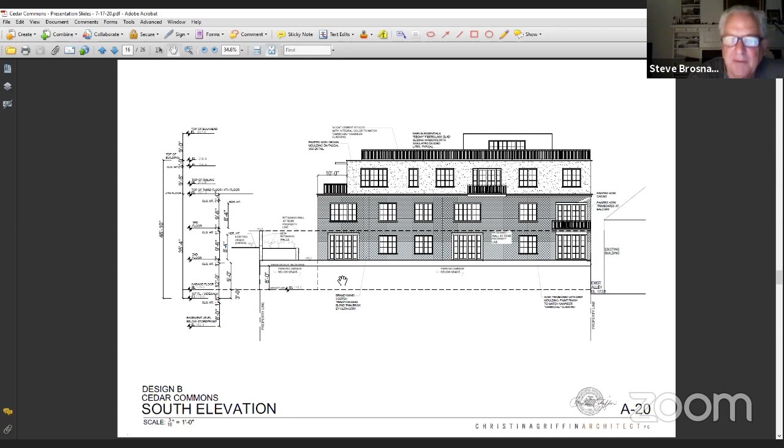Yeah, I'm just curious to see what they're going to be looking down upon. It might take me a moment to pull them off my phone. So if you want, we could talk about something else for a moment while I pull them up. I'm going to mute myself for a minute and find them. Okay.

Steve, I think at the last meeting we looked at the grade elevations of the church parking lot relative to that retaining wall height, and then the roof height and bulkhead height. If I remember correctly, the parking lot grade elevation was a couple of feet higher than the level at the property line, where that retaining wall is at the back. So from the parking lot, you do get a view of the back of the building.

I think the goal is to make it a good looking building to look at. You're going to see it as a 3-story or 4-story building in either scheme—it's visible from that parking lot.

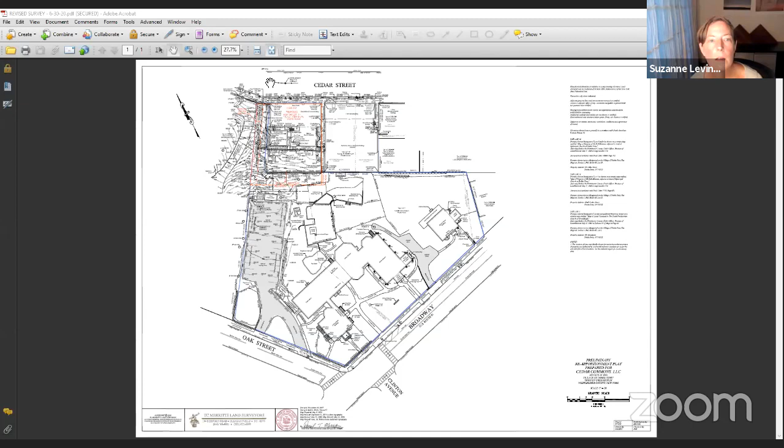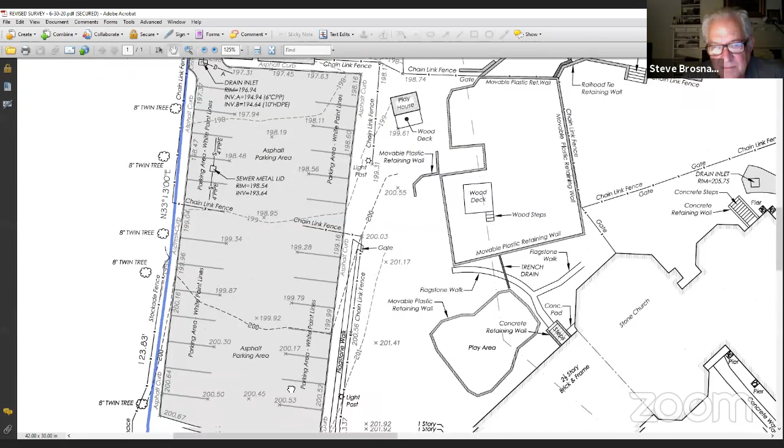I think maybe I'll share the survey for a moment too, just to show you the relationship, and then we can move on. This is the relationship between the properties. So this is where we were looking. This is the church, and those photos were taken in this parking lot here, right? Yeah, here, right here, we were looking here. Zion is over here. Sorry if it's not clear. No, that's good, thank you. Yeah, so Zion's over here, we were looking at Zion from here.

I'm gonna just mute myself and look up those calculations, and I'll let you know the difference between the 4th and 3rd floor.

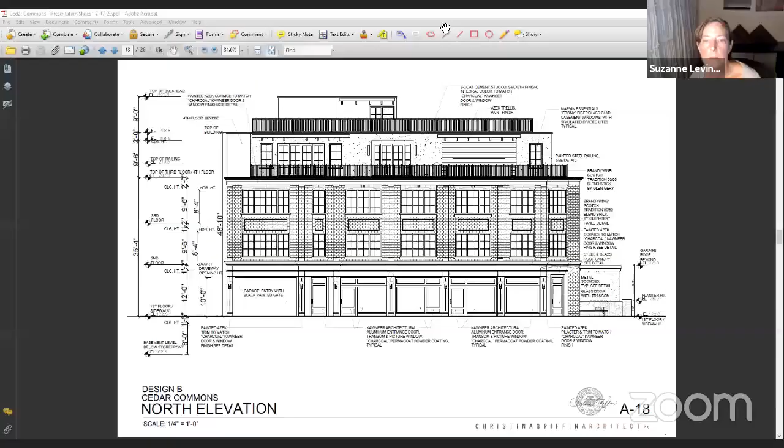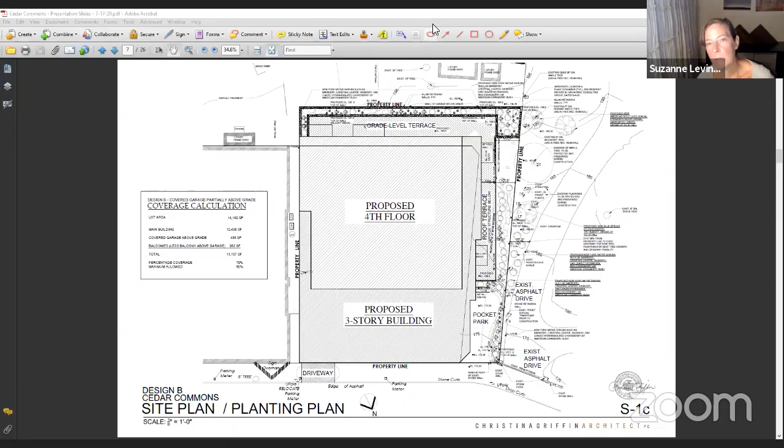Just in talking with Save a Tree, this is the green space here, this is the property line, and there's a very narrow strip of green space before the Zion driveway. What they recommend is 10 feet of green space before the planting of taller trees. So that's why we've located a proposed blue spruce, I think it grows to 15 or 20 feet right around here, and the holly's back here. So the green space distance was an issue, and also the visibility as you're coming down the driveway. I just wanted to share that.

Thank you. And I also have the calculation on the 4th floor, if you want that as well. That I definitely want, yes. Okay, so the 4th floor, as it is now, is 60.8% of the floor area below. The 4th floor is 6,260 square feet, and the 3rd floor is 10,289. So if the 4th floor was to be 50% of the floor below, we'd have to cut 1,115 square feet, and that would make it 50% of the floor below.

And Laura Lee, you're saying, and Ed, maybe you could chime in, that's what the code requires. In that text, yes, in the provision of the text, not the table, it indicates that it should be no more than 50%. We can probably make that happen. You know, I think we could, and keep the 3 units, just reduce the size of them. But I think we can make that happen, reduce the 4th floor so it does meet the code. That would presumably reduce the massing.

And if I could go back to the buffer and the arborist, it would seem to be very helpful if the developer and Zion could work together and find something that's mutually agreeable, because I really feel like that would help this process.

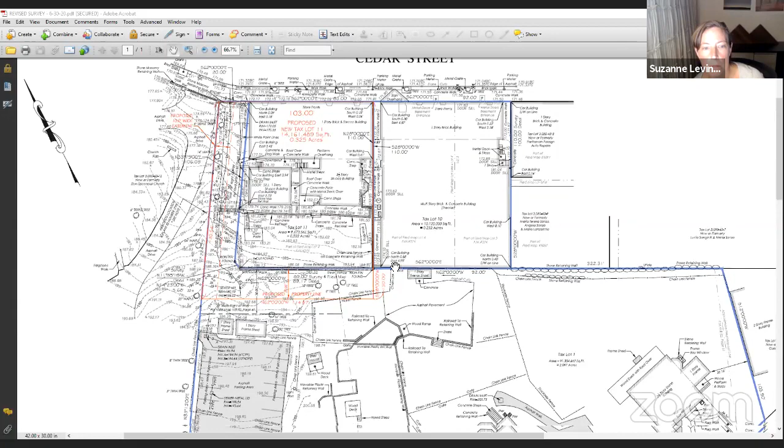Are you looking? Yeah, that's what I read. I'm just looking at this. We can take a look at that. I see this at 190. Are you using 198? Yeah. And what is it down on Cedar, at the front door? 172. Right, so I got those numbers correct. So am I wrong about those heights? I'll have to check, I wasn't sure where you were getting them from, but I knew we had them on the survey. We can look at that from that point, from the parking lot.

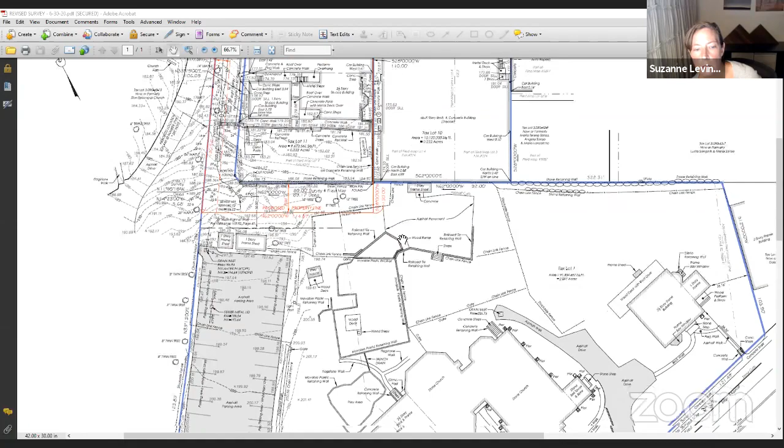Just a heads up, I also asked a question, Ed, because the code allows us to have the height at 45 feet. This is proposed at 46 feet 10 inches, I think. And I'm assuming, based on our conversation, the bulkhead increasing it by 9 feet is excluded from those height calculations? Yes, as I said at the beginning of the meeting, you need to give a waiver of 1 foot 10 inches. The bulkhead is excluded by our code. Okay, and Christina, is there any way to have the scheme be without the extra foot and 10 inches?

You can think about it, let us know. I just think, if we're allowing a fourth story and we think that's viable under the reasons in the code, also making an exception for the height in addition to that, plus the parking, there's a lot of variables going into it now. So I just want to make sure we understand if it's possible to take them out. We can take a closer look at that.

I have a question about the bulkhead. That will be architecturally pretty, I mean, it's not just going to be sticking up there. You will have it blend into the building, am I correct? Some windows will, usually we want it to be very quiet, the bulkhead, so it's got to blend in color and detail, but it probably won't have as much detail as the front facade.